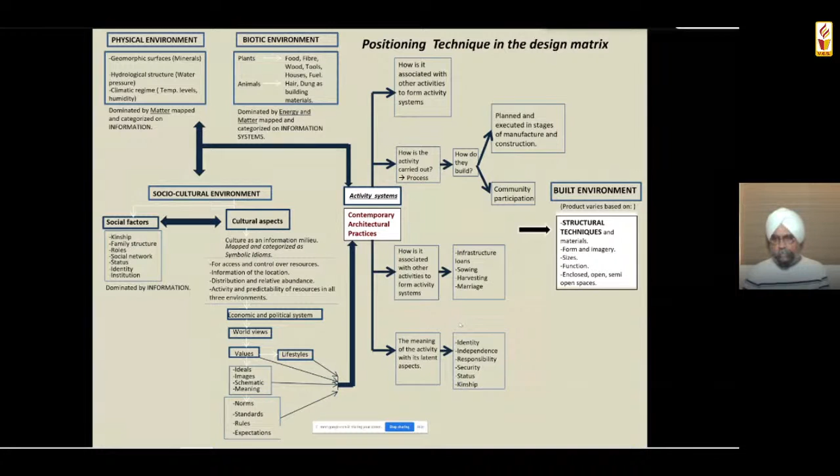So while the main theme of this talk is about alternative construction technologies and materials, I would like to share my perspective on this. If you can see on the right, you have the structural techniques mentioned, as you know, the end result. But there is a plethora of things which actually affect this.

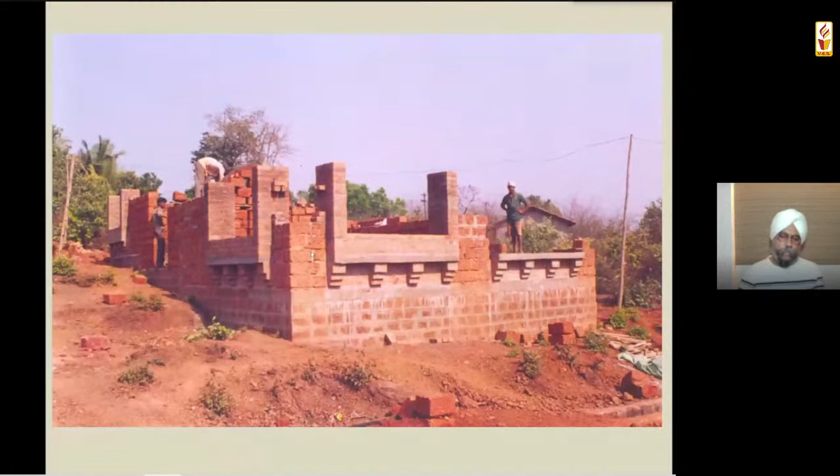Here's another example of applying Bakerji's techniques. This was a building in Goa where we used laterite because it's locally available. But in my quest to reduce the amount of cement and steel further, I used mud mortar in these walls for the first time, trying to make the walls without any cement. The slab is a filler slab with mangalore tiles on it for waterproofing and cooling. Here you can see the process of construction, where the bay windows are done in brick, the walls are done in laterite, and the arches were also done in brick, with only the keystone in laterite because it's very easy to shape a laterite stone at the site.

So you can see the mud mortar in the laterite wall here. This was my attempt to at least reduce the cement.

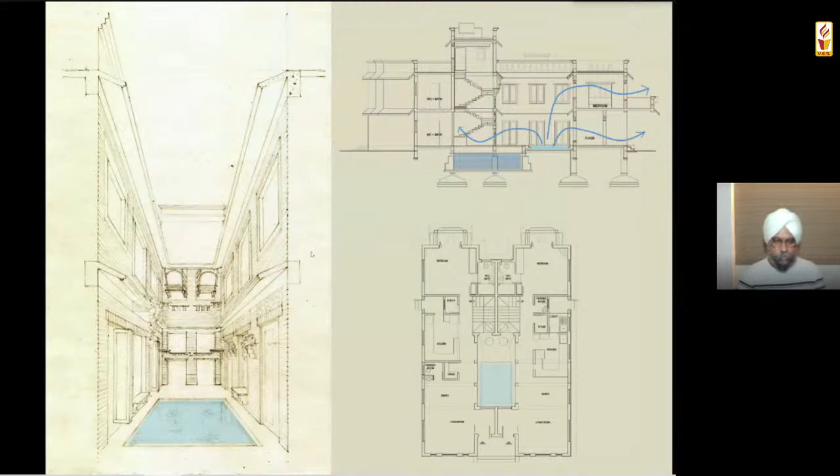Now this is a building in Gujarat, in Baroda. It's a twin house, built for and with my friend and classmate, Neha Kabawala. This is her house, and those are the drawings where we used passive cooling features. There's a rainwater harvesting tank, and a water kund in the center, which ensures good cooling in the building due to evaporative cooling—that's the chowk you can see.

Now my primary theory is that we have generally been studying, academically, the monuments or the urban buildings more, and there's not enough stress on the vernacular.

Whereas the 2011 census tells us that there's a very large population which is rural, and the urban is still small. So even in 2030, 50% of India will still be living in villages.

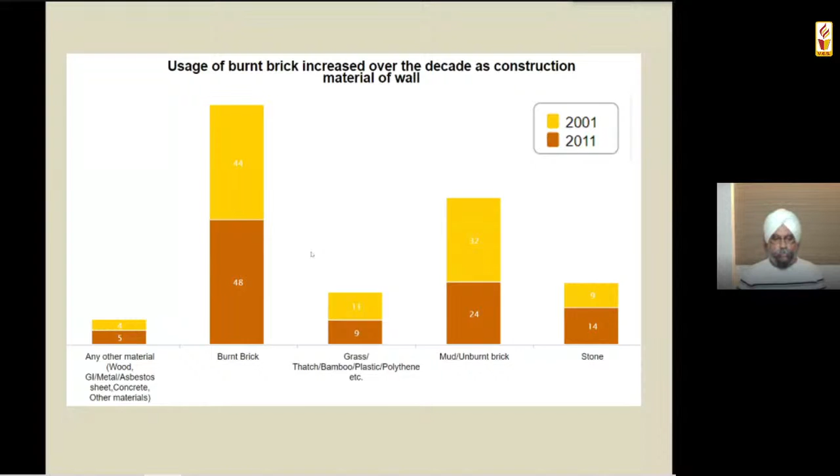Along with cement and steel, like Bakerji said. Here you can see how, between 2001 and 2011, the choice of materials has been changing.

Also, in architectural practices broadly, you have a high-style tradition and a folk tradition, and they are very, very different. So my practice tends more towards compromising the high style and learning more from the folk tradition.

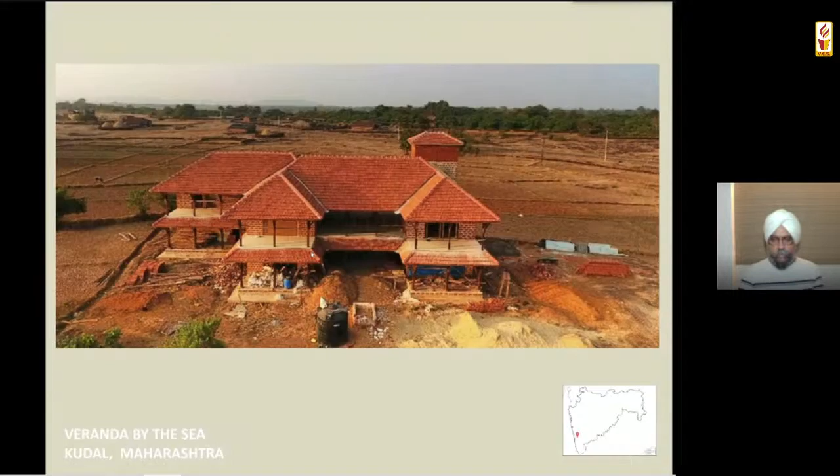This is a house we did. This photograph wasn't from when we completed it, but it was a good drone photograph, so we used it. It's a house at Kudal, just before Goa, facing the 180-degree sea view. You will see verandas on all the seaside. Now this building here, I was able to...

This is like a veranda, facing the seaside. Now, this is another project closer to Bombay at Kamshet, a homestay which is now also very, very successful commercially.

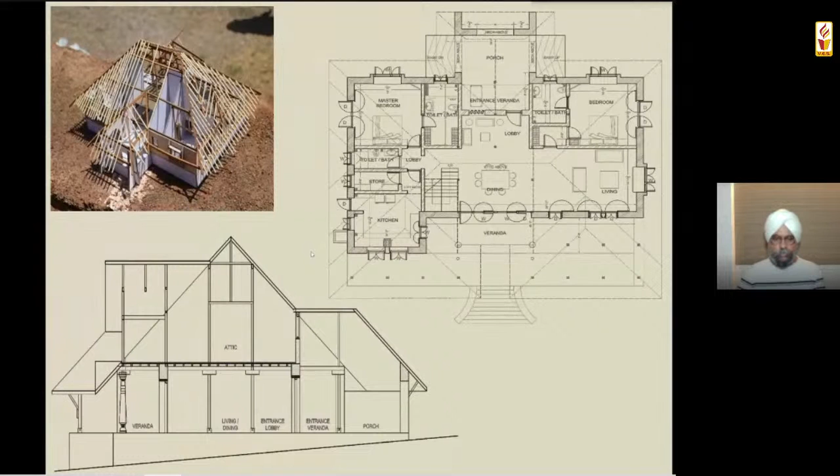You see on this side, you have stone masonry up to around 8 to 9 feet. You can see the model because there are very strong winds, and it's a sloping site, so the rains lash at this building from the west. Generally you have stone walls in this area - we learned from the vernacular technology. So on the west you had stone walls, on the east you have a veranda looking at a river behind. You can see the roof.

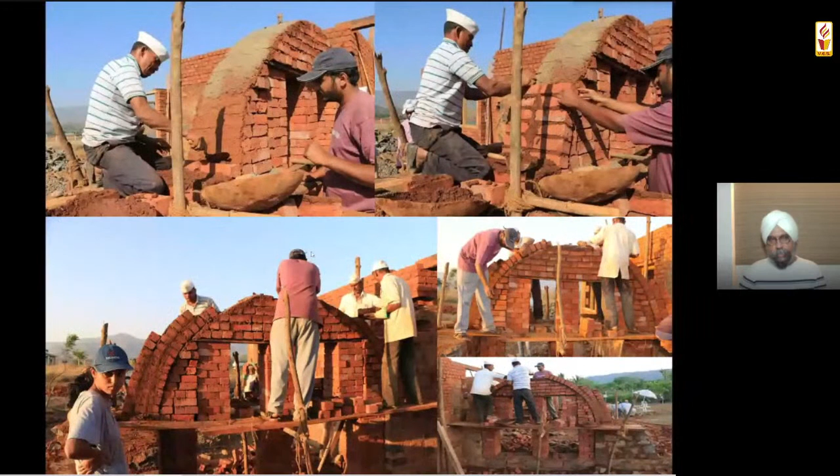I must say the client, Armaiti Mewawala, really participated very closely in the building. This is my team, architect Dhruang Hingmire and Priyanka Gunjikar, working with me helping the masons build the arches. You can see these arches are made completely in mud mortar, and this is how they look when complete.

That's the entrance porch of the building. That is how the first floor looks - as I said, it's a timber floor and the entire superstructure is timber. It's partly timber framed, timber post and beam, and partly load bearing structure. And that's how the balcony on the first floor looks.

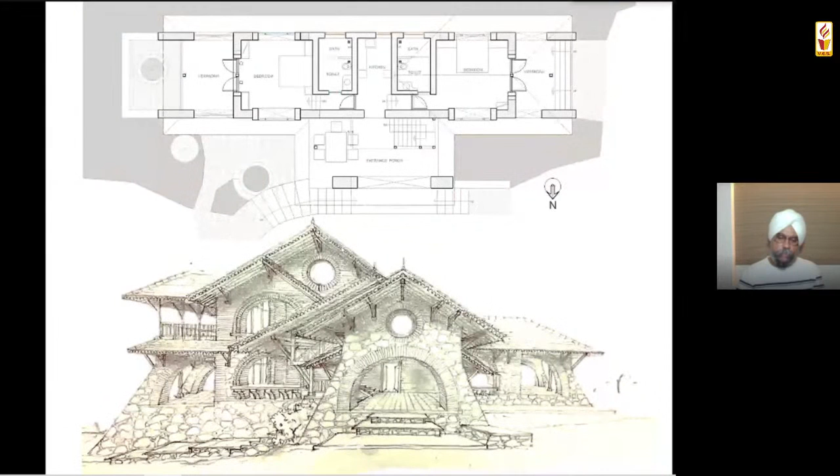We like to have a lot of participation from the clients. This house belongs to the same client - after the success of the first house, she had us design another house close to the first. This one comes almost perpendicular - you can see to the right, the house I just showed you in the background. This house sits in an almost side-open space, with a linear design, one room after the other, hence the language of arches.

This is how both the projects look together from the lower side. It is a sloping side, therefore we had a G+1 situation on the east, and there's a nice view from this side towards the river. That's how both the houses look together.

You will note the difference in language, but there is no change in the material palette. Because we had a narrow series of rooms, we used a different structural language, but the materials are the same. This is another house near Khopoli.

Same material template really, using... you can see how there's a double height space, and we make use of the veranda and the open space. You can see the planning in the model.

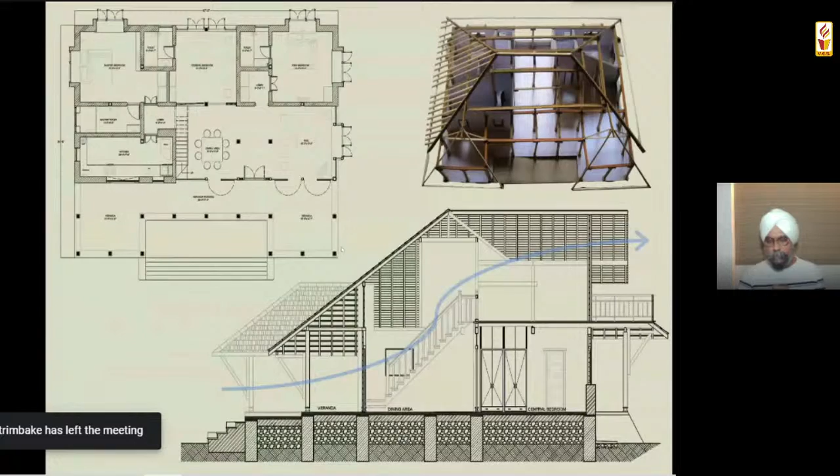Again, no cement or steel in the building, right from the foundation. All these buildings are done completely by local people. There is no team which travels from one place to another and builds these houses. Every place we work with local people.

That's the veranda, where most of the life is generally in these kind of places. I must also say that most of our users have slowly shifted more of their life into these houses which we have built. In fact, they spent their entire lockdown in these houses. They did not really come back to Bombay.

That's the open living cum dining area, where we did not need to have walls on the side of the veranda. So we made basically a fabrication plus glass wall, so that visually it is open to the veranda on one side. There are no solid walls, but the security and visual connection is there.

Here's an example of detailing and how we look at technique. This staircase is made entirely out of the leftover wood from the roof.

This is how a typical bedroom looks with the bay windows, lime plaster, bamboo jigs, and smart lighting. This is how the attic looks. It opens up to a deck.

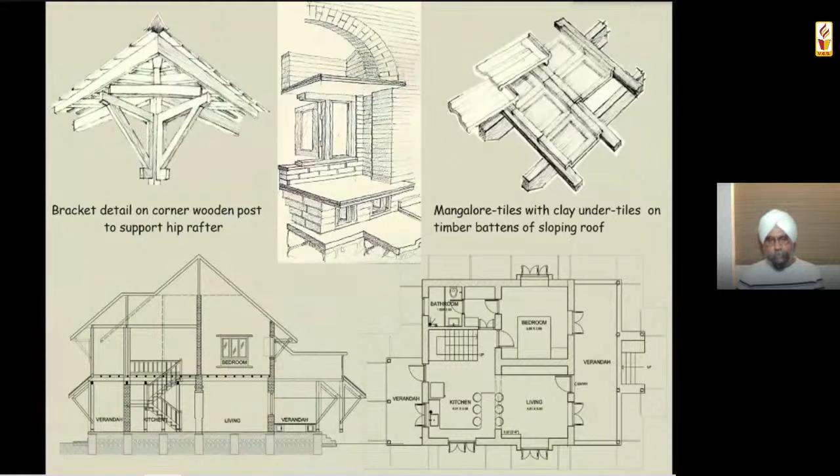Here you can see some construction details of how the roof is done. There's a double clay tile roof, so this is extremely efficient thermally, and there's a very huge temperature difference between outside and inside.

Then you will see the wall between the living and dining, and a living room upstairs. It's all done in mud mortar. That's how the roof is done, the double roof tiles, so that becomes extremely cool. And we made space for exhaust and diffuse light also coming in.

Now we work with different sections of society. This is a community of natural farmers, and there is a tribal family which lives there. So we help them make a house.

Needless to say, I think I will not say anymore that we don't use cement and steel. But here you can see a Cob wall, which is only 9 inches. The 9-inch mud wall was done by using intermittent brick piers.

This entire wood for the roof is basically from the trees which exist in that area, right behind the house. So we just made a scalable model, and that model was used in a meeting with the carpenter. The model was scaled, so they used it, they took the tree down, they seasoned it for some time, and they used the wood.

Also, the treatment for the wood was a kind of alcohol which they make out of mahua flowers. So what we do is we heavily discuss our details and treatments with the locals, and we keep adapting rather than using one standard detail.

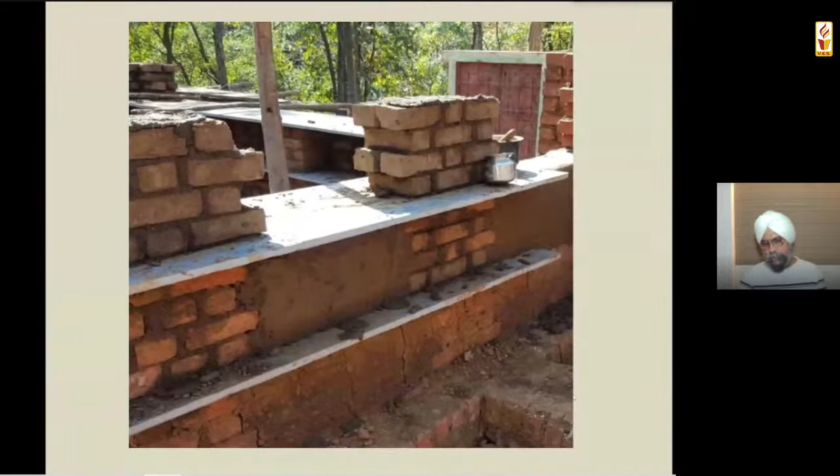Here you can see how we make a 9-inch Cob wall by putting these stone slabs in between, which later on acted as storage shelves.

This was a kind of diversity of people who had come from all over the world, visiting here to work on the house while we build it with our own hands. There were no contractors here. And the house is done at Gudi Padwa Day, and we all had a party after that.

So it's a community house done at very low prices with the local people and with people who participated in the workshop. That's the party.

Another house - very interestingly, there's one aspect I'd like to share. So you have this house and this house. Both were inspired - or let's say I used this house as a reference to show them.

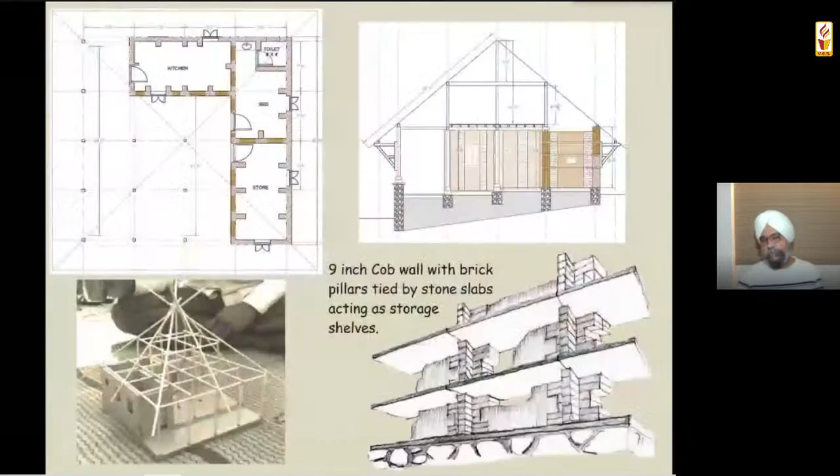So I showed them this house, and they all loved it. They were inspired and given confidence by the fact that this can happen in their area, and therefore they asked me to help them with this house and then with another house in this place. So the point I'm trying to make is that our architecture and technology can be very intentionally done so that people can copy the house and learn good things from it. It's a deliberate attempt to make copyable architecture.

Hence, the technology I use is generally very easy to understand and comprehend. It necessarily belongs to the local people, and is therefore just adapted by me slightly. That makes two things: one, it makes it copyable. The other is it makes it buildable, because I don't have to search for a team from somewhere and carry them into this place - I design after finding out what local people can do. So because of that, I don't have any opposition from local people about me getting outside people to do the work. I employ them only, so they actually very happily come and help my project succeed.

So this is another house in the same typology, and our details evolve a bit. Here you can see a bay window done completely in timber, so it becomes light - almost modular and easy to build. These are buildings where the open and living areas are all without any walls, as you can see, whereas the bedrooms have walls.

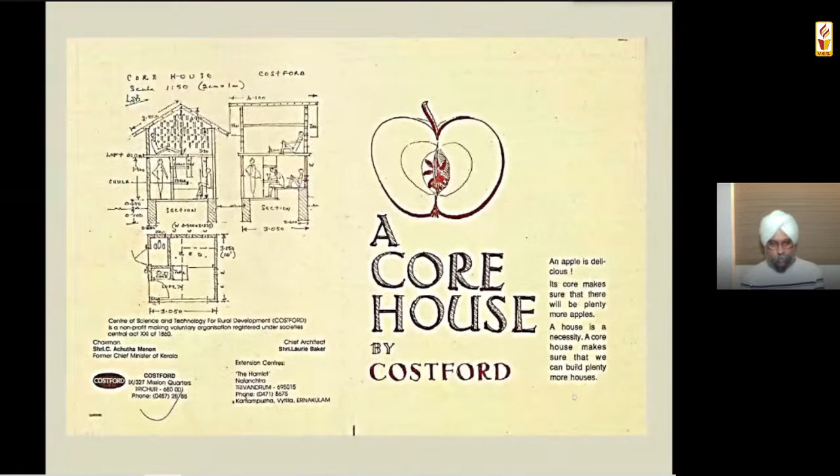I'm sharing a slide from Bakerjee's book, published by COSTFORD, where he explains the concept of a core house. So if you want to design in a village, in Indian villages, they use a core house as a concept. If you can see these sketches, there is a main building which is a little taller, but it allows for future expansion on all sides. This is the reality of the majority of the population of India, and it should be important to really factor in these things.

Here's another case - a traditional house in Wardha, where I've done a building. It's a classic case, central tall space. This place, Wardha, is one of the hottest places in the country, so it has nice thick walls. Gandhiji's Sevagram ashram is close by.

I use the same local technology. This is the house which I have built, and I'm extremely happy to know that the house does not look like it was done by an architect, because for me that is the success - where local people should be able to build it.

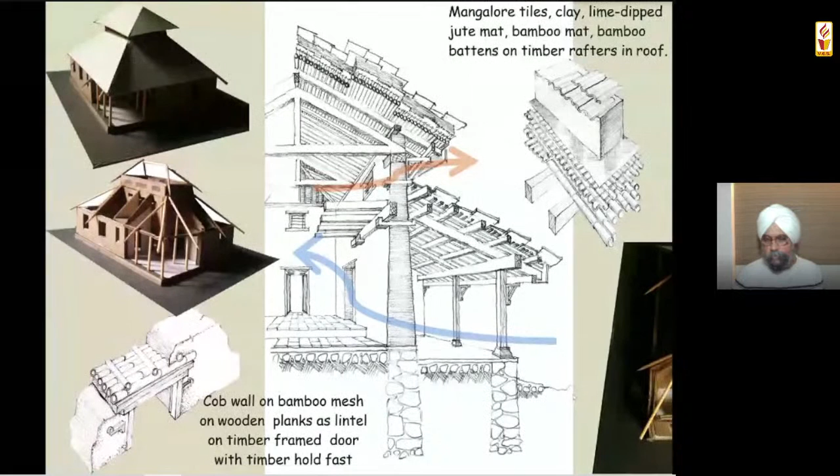These are the details - if you can see the cross section of the house, the lintel detail to the bottom left, the roof detail to the top right. The success of this approach is that this is the Cob wall being done over there - thick walls - and many people have been inspired by this and used these same people to build their houses.

So other organic farmers have had these houses built there with the same team. After seeing this - this is the roof where you see bamboo kind of boarding, on which further layers were put. This is the internal space where what you see as a raised platform is a dining area connected to the kitchen. These are completely mud walls, 16 feet tall - Cob walls which are almost 2.5 feet thick at the base, made of traditional, very clayey soil.

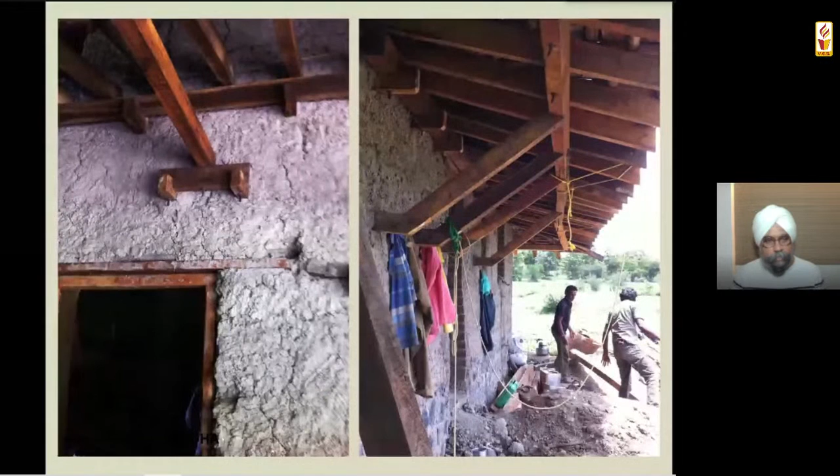It's trampled by bullocks and added with vegetable stabilizers, and some details which we evolved with the local carpenters. Here is one of our architects, Dhruang, working on a Cob wall, a 9-inch Cobb wall. This is at the Karjat project, the Vanwadi project, but with bricks and piers.

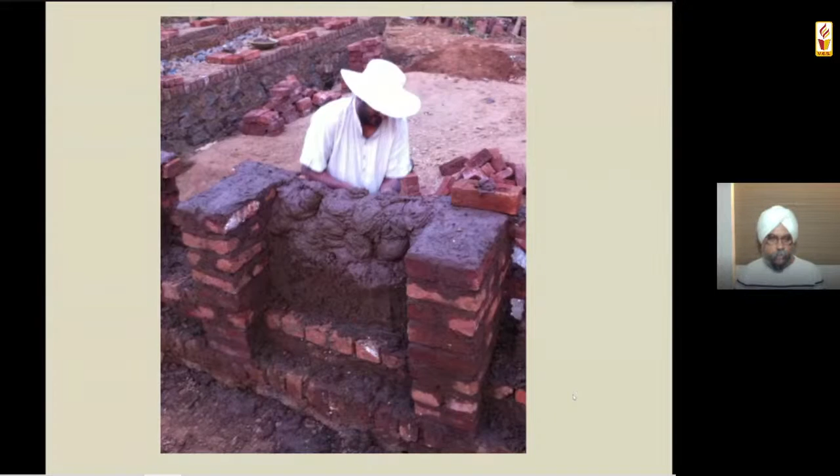Now I wanted to draw attention to a model of cultural ecology where Julian Steward says that technology is the window through which people may look at the environment. So our adaptations are mainly about how we use this technology. Unless you understand that the social and the ecological system are continuously related to each other, we will not be able to find good solutions in architecture.

Once again this slide comes up, where I will pause to explain that structure and techniques are an end result of a lot of considerations on the left-hand side. You have to see how people look at materials, and what the cultural aspects are.

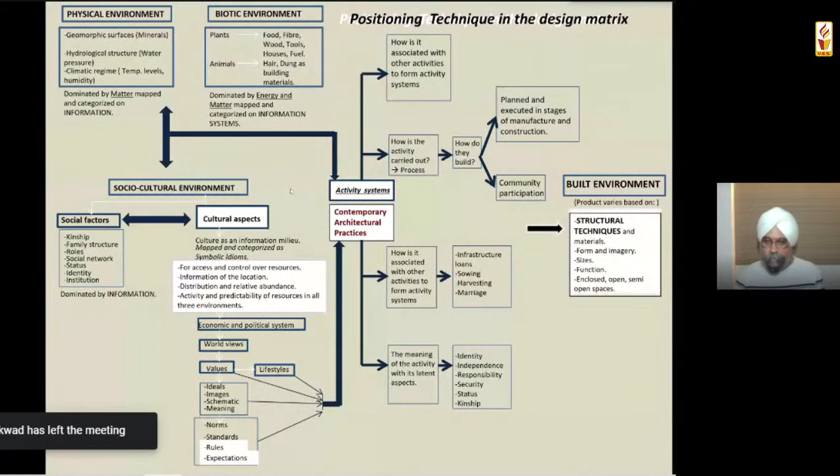I understand that the people I build for have economic and budgetary constraints, and if I use specialists from somewhere else to design and build, these people will not afford that. So I work with local people, but I tweak and add to their understanding, developing the designs a little so that the same local people can build it. That way, the cost remains in control, local people get work, and if someone else wants to do it, the same team can be used.

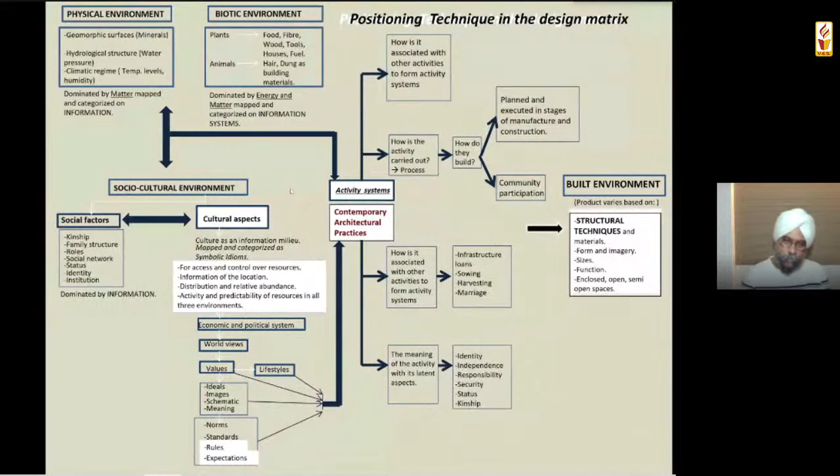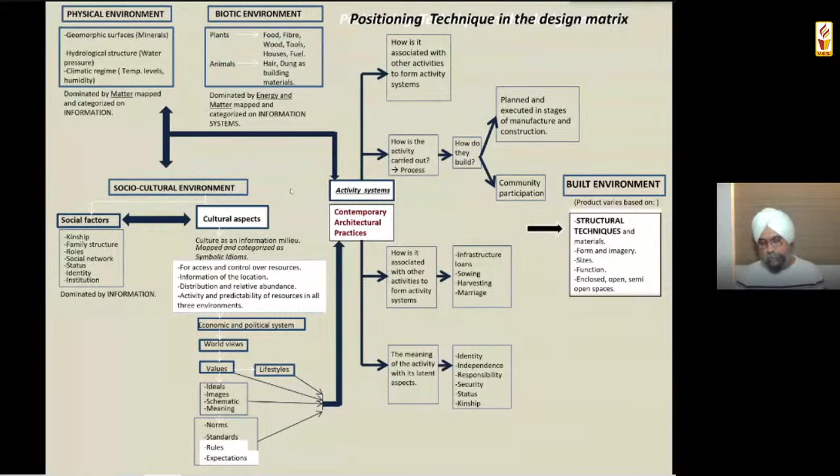People want to copy this architecture—I know that most architecture or fashion happens based on inspiration from what you see. I'm interested in creating good things to inspire people, good things to copy. When I say good, I mean with a very clear stand on the environment and on culture.

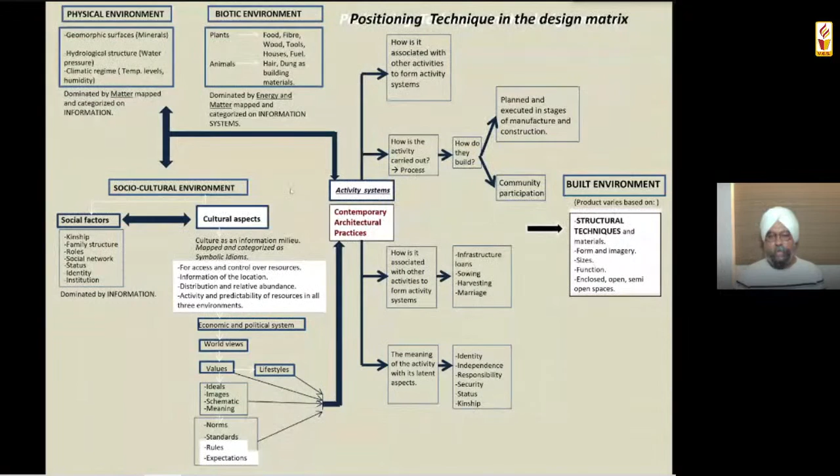I suggested we bring down this building instead of building another one—pull it down and salvage all the materials in the best possible way. So we went around looking for materials, local people, and local craftspersons.

We found a house which was dilapidated. People were ready to give away all the materials, and they sold it to us. The client was Keith De Silva—he was very sensitive and sensible.

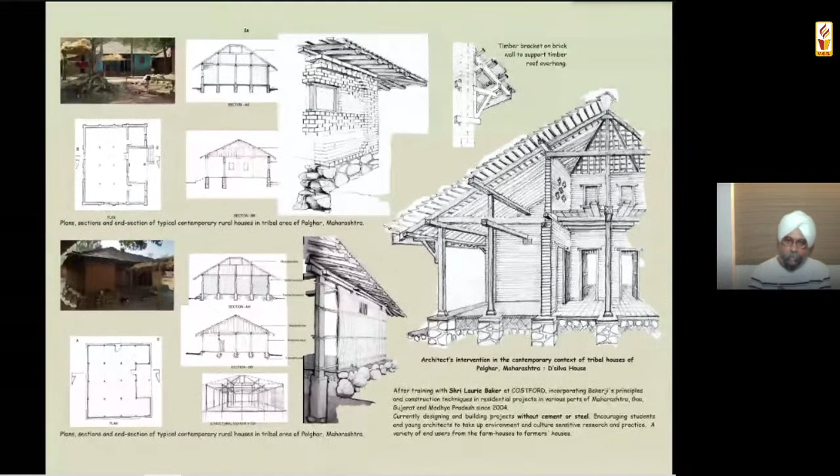That's the model of the house. That's roughly the planning sections.

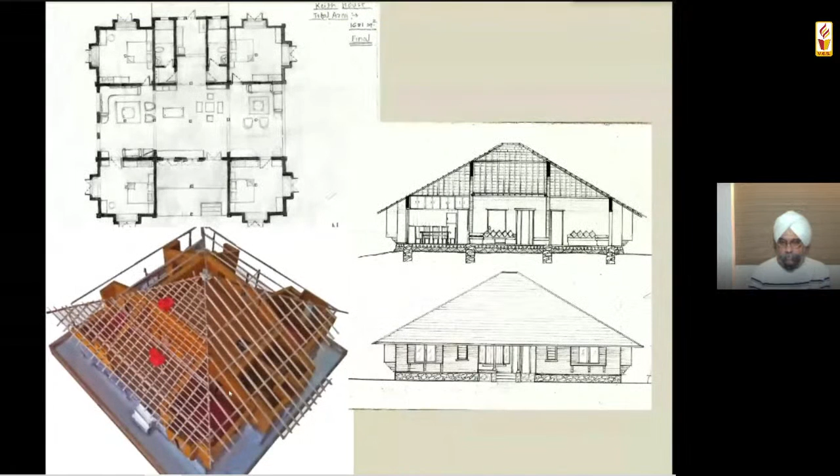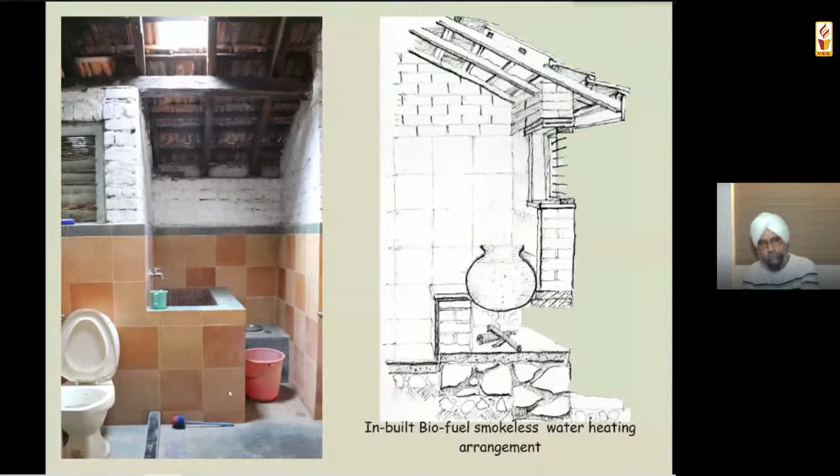This is the bathroom. You can see that we've made, of course, this was the client's idea, a kind of smokeless water heating vessel in the corner, as seen in the photograph. Just one glass in the roof, replacing a tile, gives enough light.

We made a couple of bedrooms which did not have any walls or windows. We just made a chick out of the local carvi.

The other 2 have proper walls and windows. So this client was very happy.

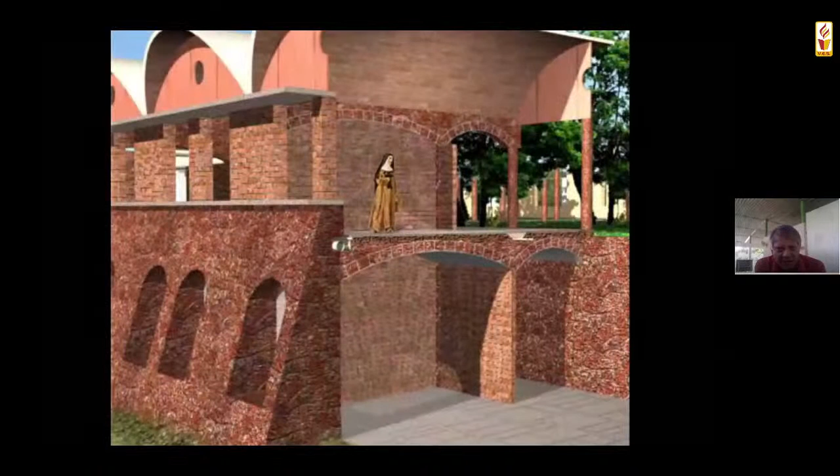So we realized one thing: when building in a masonry structure, it can last forever. An example is this monastery we designed, which the Spanish nuns wanted to last for 400 years. The only way we could design a building that lasts for 400 years is to do it completely in a load-bearing material, because concrete and steel, which are tensile elements, can only last 75 to 100 years. So how do we actually build that?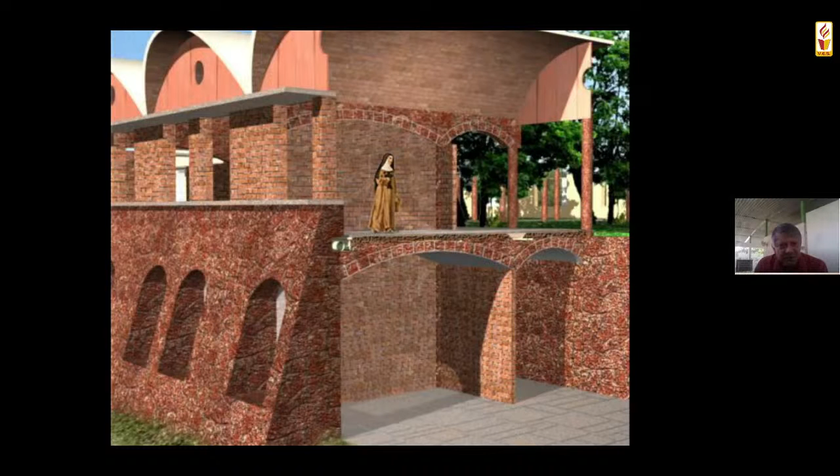Every system—the walling system, flooring system, roofing system—was planned to be completely in masonry. We left little areas for the services to be upgraded whenever needed. Of course, in the final product, being in Goa, we responded, at least in the roof, with a more traditional looking roof rather than a vaulted system. That's the monastery. We've also built in different parts of India.

This is the Hampi University in Kamalapur—the Kannada University, actually, it's called. That's just the library building. The library building itself is 50,000 square feet. It's an enormous library building.

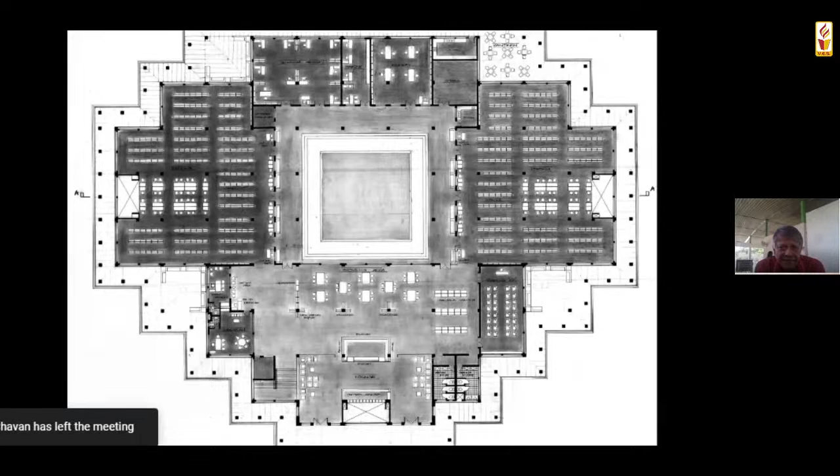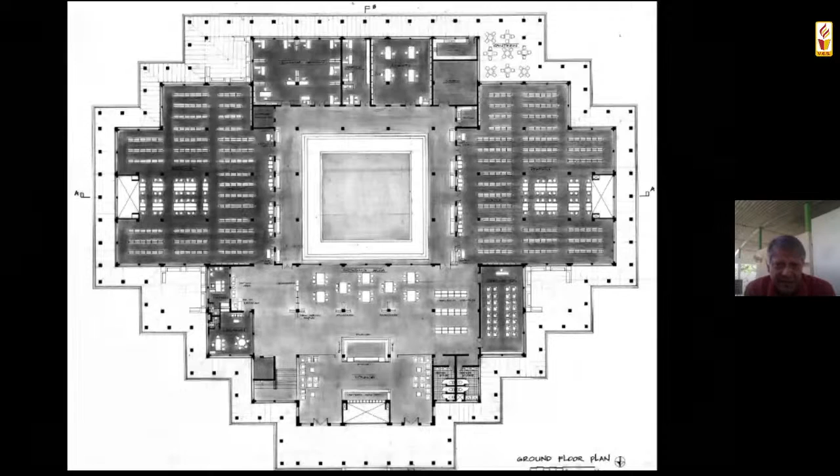It's taken into the building and escapes through a central courtyard which has a water body in it, creating a constant flow of air through the library, where you can see stacks and reading rooms. There you can see the gopurams and how the air moves. The whole building is almost completely made of stone.

When the contractors wanted to construct it—six meter tall columns, half meter by half meter—they said, no, we can't do this, we're used to concrete. We said, we did this 200 years ago, so why not do it now. They quickly got their act together and built this building in stone. So it's very easy for us to recall traditional systems in building. It's still available, and it must be tapped before we lose it forever.

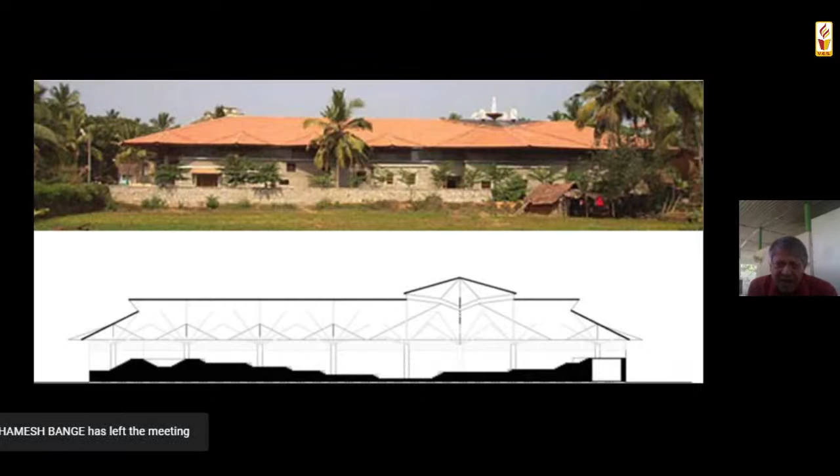This is the cathedral in Karwar, just south of Goa. As you know, a cathedral is a mother church, so it's an enormous church that can seat close to 1,000 people within it, and outside there's a platform which can take 2,000 people in an open air situation. The actual altar moves to the back entrance, and the whole service almost flips.

Here, granite is a local material. Since Karwar is an export zone for granite, all the waste granite from cutting those blocks we used in the wall of the building. And we created these floating columns.

Each column is an independent structure with a little pad that goes in the ground, and a flaring structural system that supports the whole roofing system, like trees almost. The wall is actually non-structural—even though it's solid stone, it only comes up to a certain level, with skylights above it completely. This lends the feeling that you're in a little forest, covered by traditional roofing systems of wooden rafters and Mangalore tiles, local to the area. The rafters we got from recycled buildings around the area.

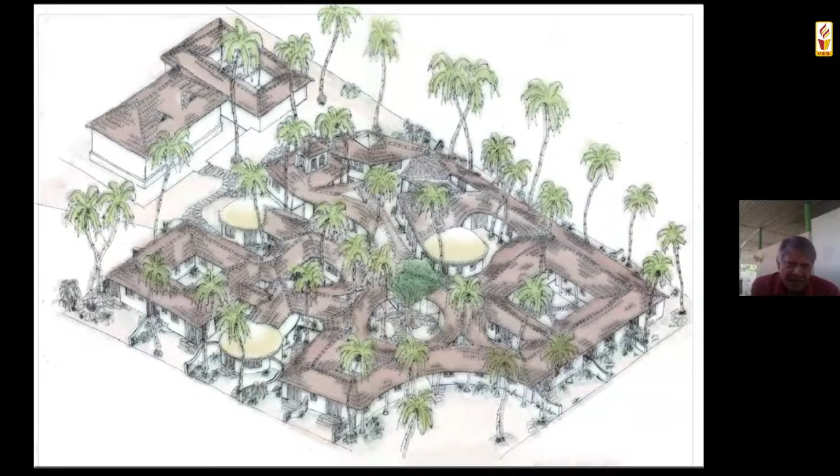Architecture is not just about buildings; it's also about the spaces between buildings. So in this project, which we initially called Country Courts, now called Laguna Anjuna, a small hotel project in Anjuna, we created a series of streets and courtyards which one moves through, with different shapes and sizes - circular, square, star, crescent - and the street moves through these courtyards, and from the courtyards you actually enter the rooms.

The rooms also have little mini courtyards of their own, private courtyards, and every room is unique - completely different from the next room. So in this way, we're able to create a sense of interest in the things. It's not like a typical hotel, where every room is almost identical.

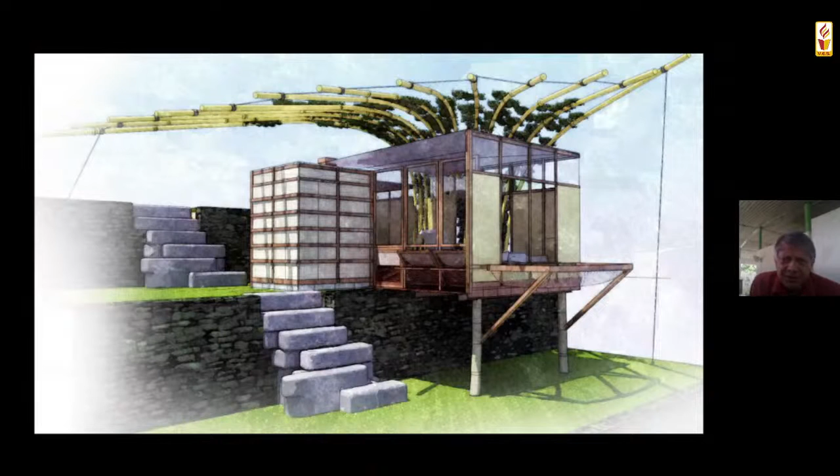So we work on a number of projects in which you can keep on shifting, which you can assemble. This is for a lodge on an island, made of panels of 2 feet by 8 feet, which you assemble together and put together. And every year you can keep on changing the whole configuration.

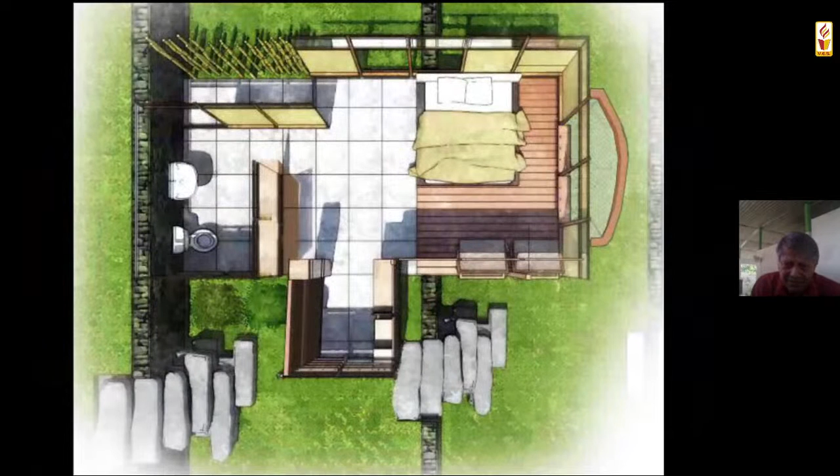And these wall panels actually also integrate the furniture, and you can keep on adding to it. So even for the public areas, it's a finished product. You can actually create a modular design.

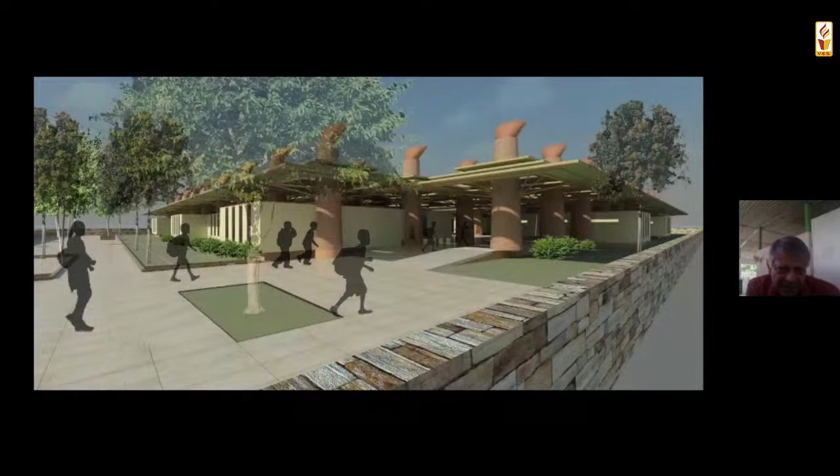Speaking about modularity, this is a school which imbibes the principles of modularity, based on a very simple grid. The grid is formed by columns, which are actually wind towers. These columns are brick towers. This is in Bijapur, where bricks are easily available.

Bijapur also has a high wind velocity, up to about 26 kilometers an hour, enough to actually take air in at a high level, hydrate it, and bring it down to cool the whole building. And the walling systems are moving, soundproof partitions.

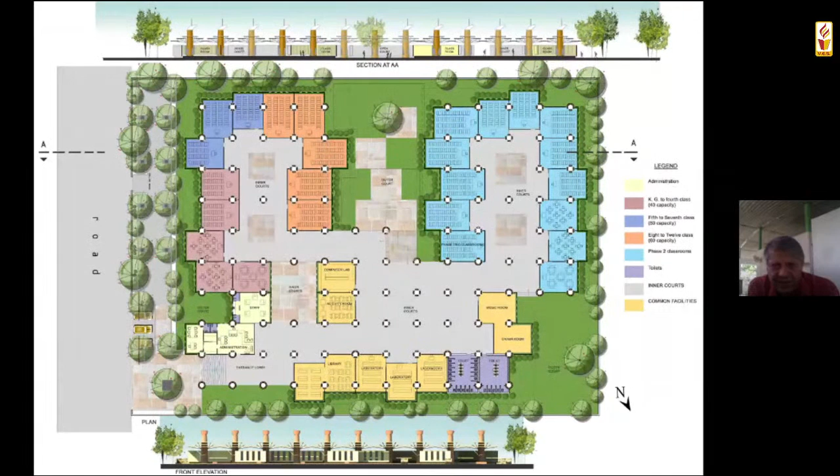So you can keep on changing the whole configuration of the school as it's being used. It's just a shading system, much like a tree, which allows the hot air to escape while the cool air comes in from below.

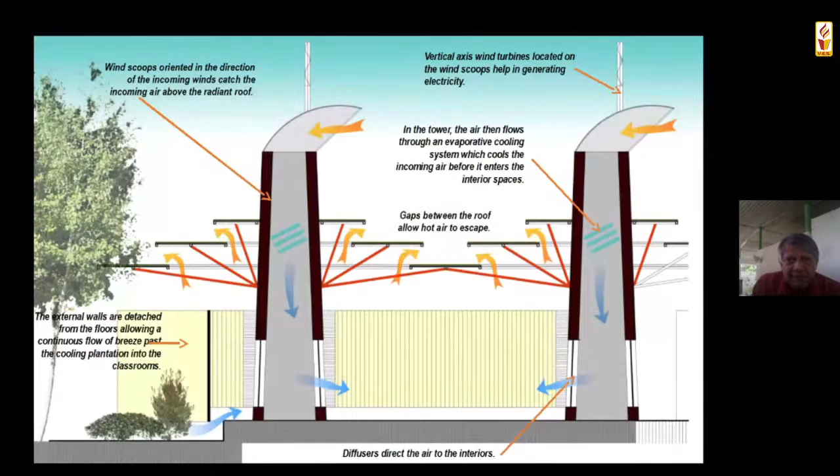This is for a project in Noida. It's a fully dismantleable building, with a hollow column, hollow beam system. The flooring is just made out of stone slabs resting on neoprene pads. And all the services, including the air conditioning, actually run through the building.

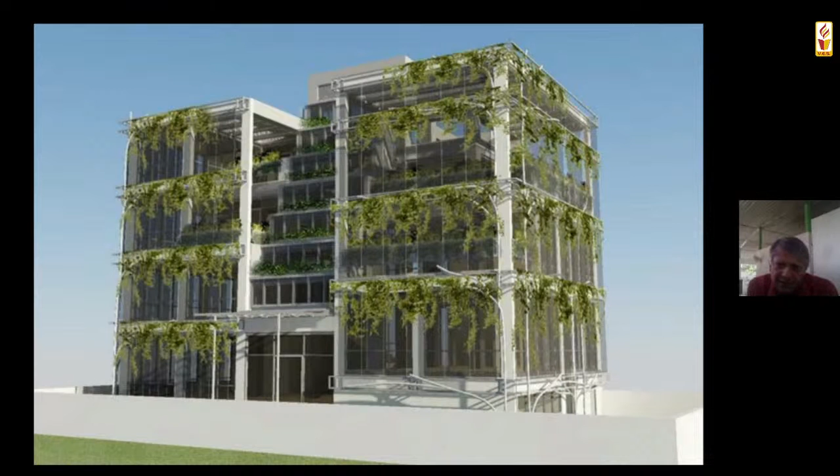Often in architecture, we have this clash between structure and services. We do the structure and we struggle putting the services through it. But here we decided to work with an integrated services and structural system. So you can see the hollow column system, the cooling system, green walls, the water bodies below that, and the various systems that we have.

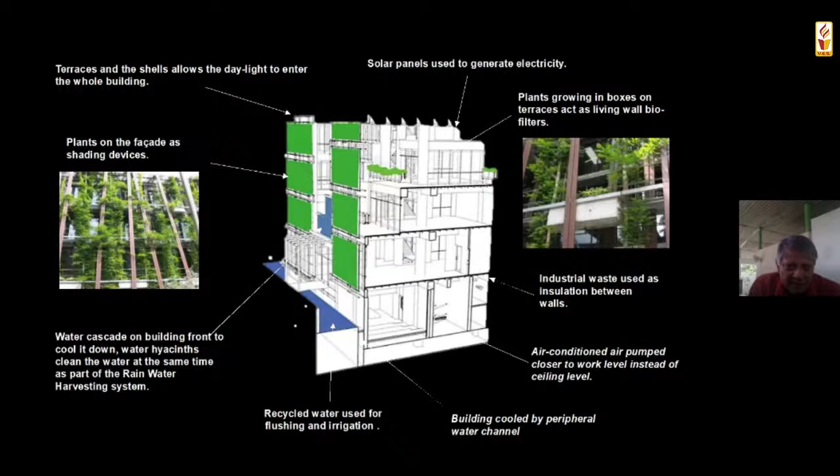Unfortunately, the building was not built because the client was asked for money. The corruption levels in a lot of these cities is very high to get a project passed. So it never saw the light of day. But that's the sad thing about architecture. And we need to, as architects, push against these forces which actually destroy architecture, forces which corrupt the whole practice.

This is for the Pune municipality. We were shortlisted to design their sustainable building technology center, just off one of the railway stations outside Pune. And so we created a center. For us, it's a great learning because it was done almost 20 years ago. It was the first time to actually look consciously at sustainability, look at technologies, materials, and systems which had design sustainability built into it.

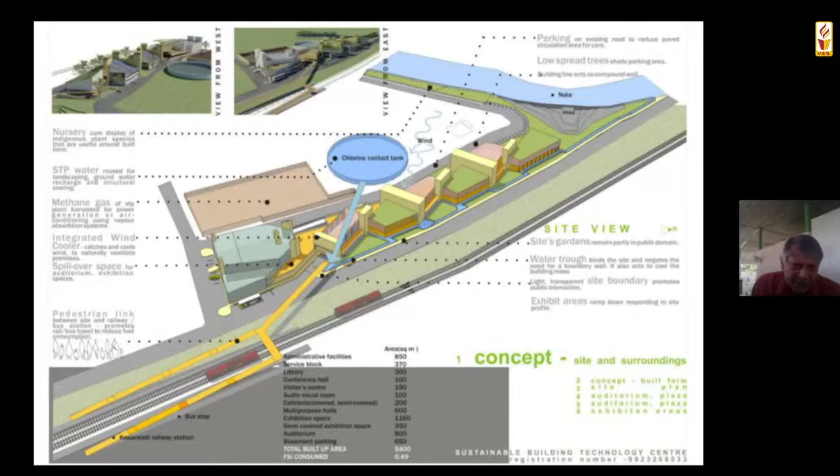So this was supposed to demonstrate the basic principles of sustainability, like an exhibition center or a science center, where people could go and actually experience it firsthand. So for us, it was a great learning experience. Again, unfortunately, this never got built either. But for us, it was quite a rewarding experience.

So when speaking about architecture, it doesn't mean that you have to always build. Because architecture is not just about building. It's really creating a system of catering and improving the quality of people's lives.

So this was for the Maharashtra Tourism Development Corporation. They wanted a 40-room hotel. And so we said, what you want is tourism. So instead of building a 40-room hotel, why don't you give tourism to the people? In this particular village called Hadi in South Maharashtra, we measured all the houses in the village, and said you can renovate some of these houses to create guest rooms for the farmers, the other traders in the village. And for the fisher folk over there, we created these floating platforms.

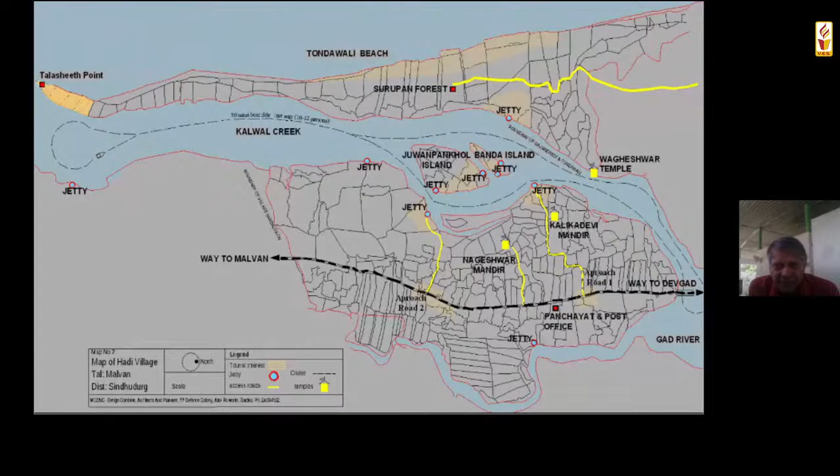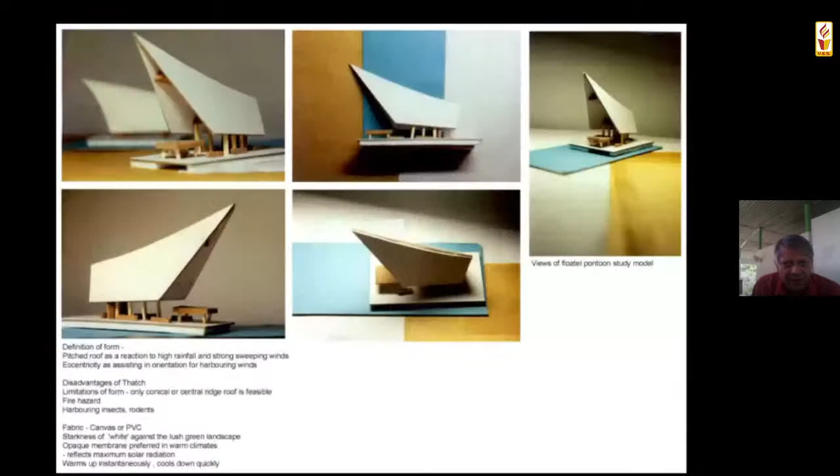Each room was a hotel room, which could come together or separate on this water. So the fisher folk already had a new form of employment. And the local villagers also could have these little pavilions, either attached to their house or part of the house, let out for guests to stay in. So they had a far more genuine experience. And the revenues coming out of tourism would go directly to the people.

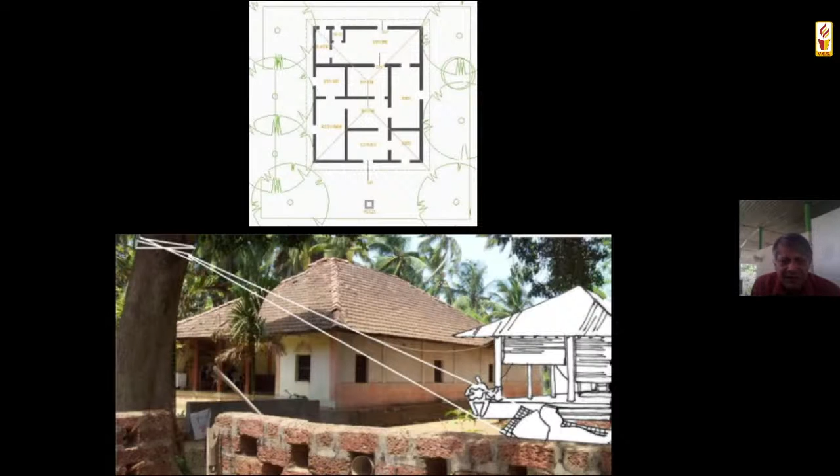So they didn't have to work as bellboys and waiters and cooks in the hotel - you gave them dignity. They became the owners of the hotel, and collectively they actually ran a hotel in the whole village. And all the money that you normally spend on building a hotel would go into developing the infrastructure - developing their jetties, their places of worship, their marketplaces, and tourist facilities needed to improve the quality of the area.

A lot of my practice has been actually connected to activism. I'm part of the Goa Foundation, which looks at ecological damage that takes place and fights it through legal means. So to keep me quiet, a lot of the times the government puts me on board with a lot of these committees so that my views are incorporated into whatever planning happens there.

So when I was on the committee to prepare the new regional plan for Goa, along with Charles Correa and Edgar Ribeiro, the first thing we did was recognize all the eco-sensitive zones of Goa - the coastal areas, the mangrove areas, the fields, the forests, the orchards, and the water bodies of Goa - and protect them. So the first thing we did was create an eco-sensitive plan, defining all the different eco-sensitive areas in Goa, grading them in certain ways, and defining all the watersheds of Goa.

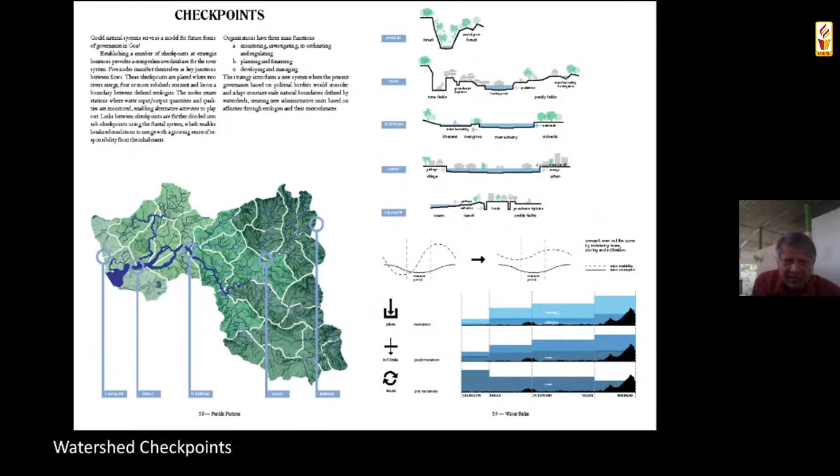So how do you define watersheds? The watersheds are the life givers of Goa. Each watershed actually waters or gives nourishment to a certain section, and generally a lot of villages are built around watersheds. So once you define watersheds, you can also define lifelines to village life. This is a study of basic watersheds in the area, part of the Mandovi watershed, and how we can use watersheds as life givers, and create communities around them.

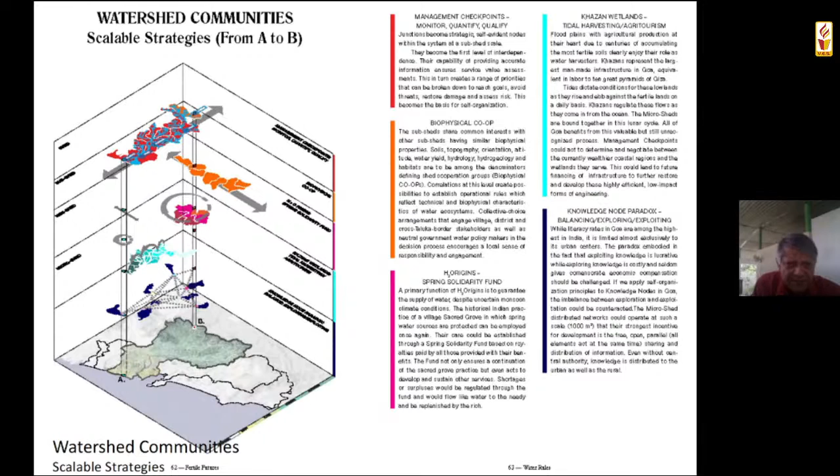So life around water—the rivers, lakes, wells—they are connected through underground streams. How do they connect to each other? And once you define that village, how can you actually let villages network? How can you create that network?

Because the village cannot survive completely on its own. Each village has a different resource, a different agriculture, a different sort of produce that you can trade with. And therefore, looking at the economy of villages and bringing them together.

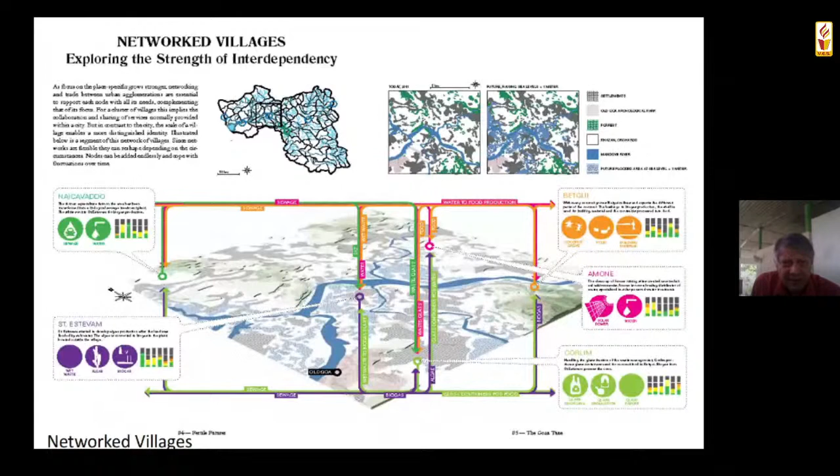So village is a unit of development. A village is a cell. Just as you have an organism made up of many cells, a village is an organism that makes up a whole region. A village is a cell in that organism.

A village consists of all the things needed for sustainability on its own—it's got fields, water bodies, orchard areas, settlement areas, grazing areas. All this forms an almost autonomous, self-sufficient system. But it does need to connect with others.

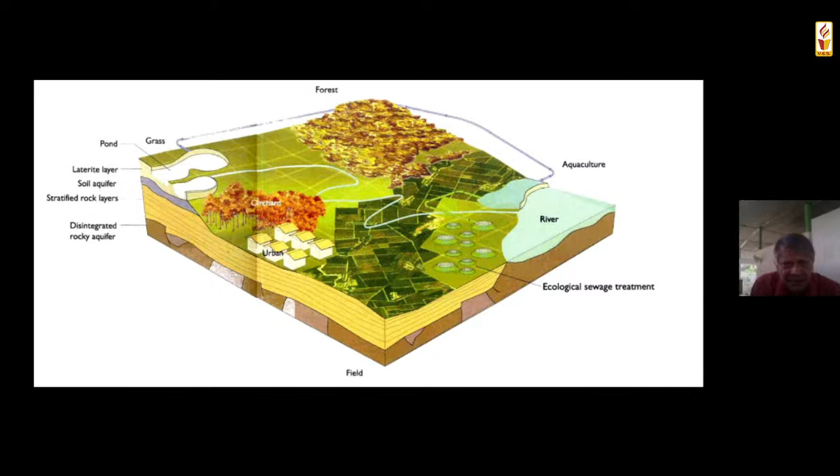Recognizing this is where we started the first step in preparing the regional plan, which is going to the people of each village and saying, map your village. Using Google, they understood the layout of the villages—where the fields are, the forests, the settlement areas—and started proposing development.

But before they started doing development, we needed them to understand what development and infrastructure was. Because for most people, development means buildings, roads, factories, infrastructure, electrical grids. And true, that is development, but that's the gray part—the hard, dark side of development.

There is a much friendlier side of development—the green part, which is where we get our water from, our food from, the air that sequesters carbon dioxide, all the nourishment that nature gives. And the area needed for the green part is probably five times more than for the gray part.

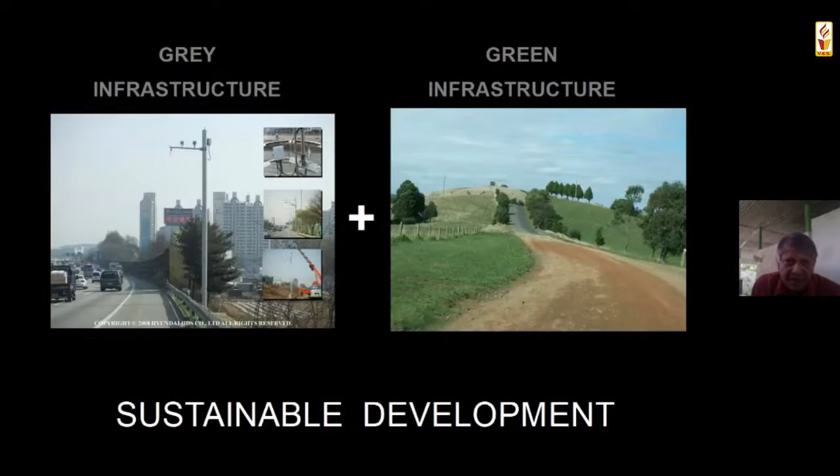So we have the gray part, which is defined in the village, and the green part, which is what gives us life. People needed to understand that before they actually started preparing their village plan.

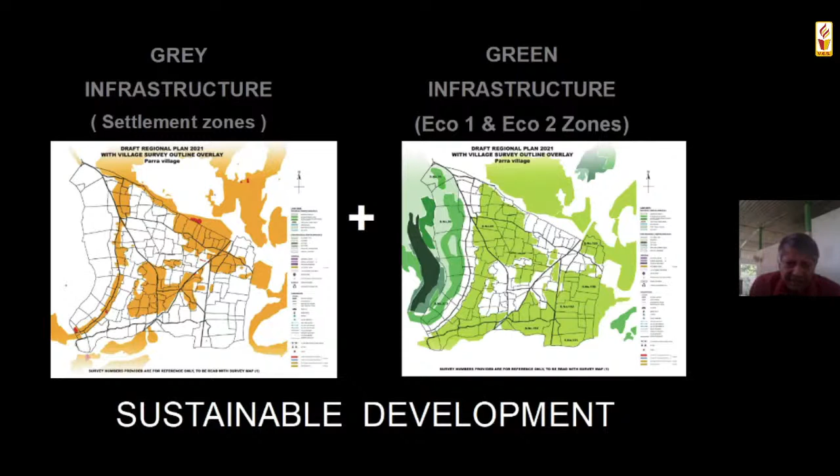This is the final village plan of a village close to me, the village of Parra. The people of the village started marking not only what existed, but also their aspirations—where they'd like playgrounds, water harvesting areas, and what sort of fields and crops they'd like to plant.

They mapped out whatever existed in terms of animal paths, bird nesting sites, and so you can see that a connection to nature was integrated into the plan.

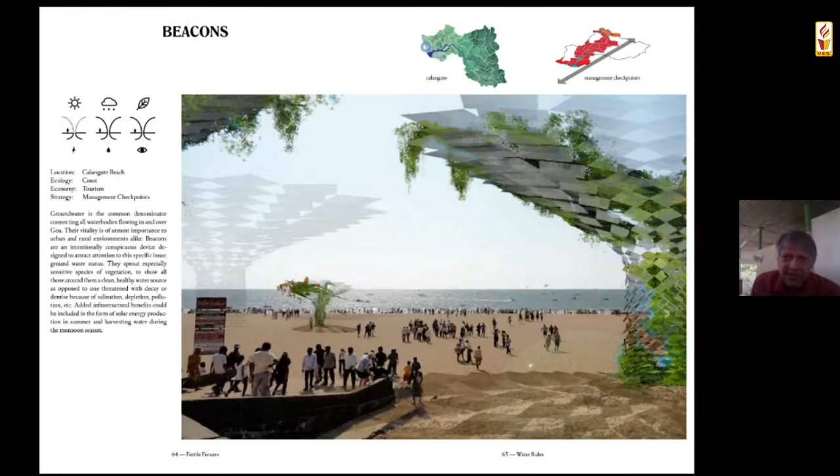Working with them was about creating excitement—it wasn't just the typical dead planning exercise. How can we make things exciting for people in coastal areas, creating centers that provide shade, stabilize soil, create water buffers in forest or field areas? How do we connect wildlife in one area? Because biodiversity is important, but it needs to be connected to flourish.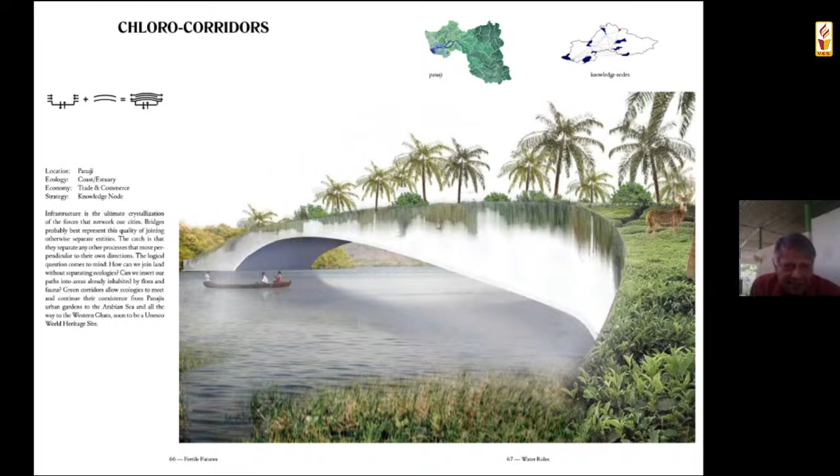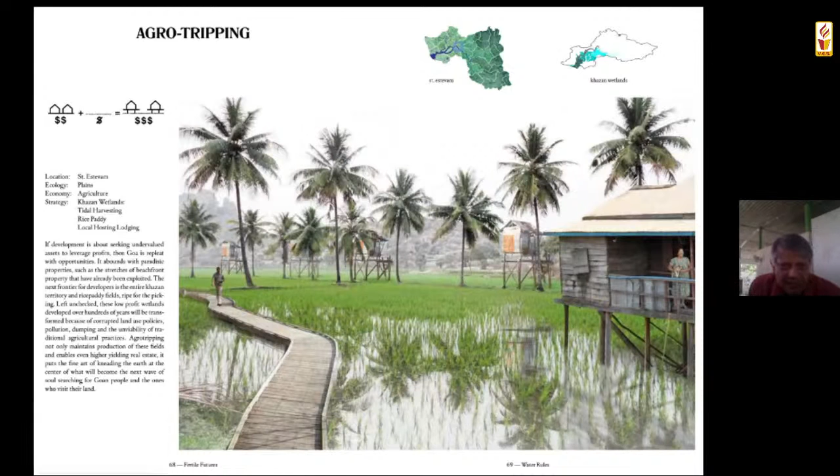Or new concepts of tourism like agro-tripping, seen in Southeast Asia—people living on the field side, connecting with nature, not just staying on the beach, but really seeing where their food comes from and how things grow. And of course, the deeper idea of creating biolinks between all the different dense forest areas.

When looking for inspiration among architects all over, one architect who is a big inspiration for me is Christopher Day. He's been an inspiration for the simple reason that while he designs houses, he doesn't design for a single person—he designs for many people. He's not designing individual houses; he's designing communities.

Rather than single wasteful houses, he's bringing people together, sharing their resources and their lives. A lot of these projects have common kitchens, common dining areas, common living areas, so people are sharing all the normal everyday burdens in creating a lifestyle. And he gets them involved in the whole design and building process.

Each unit may be completely different from the other, but they have a lot of shared resources that come together, and you can see how the development process comes together. They even share in their cooking and taking care of the kids or whatever. So you're building a community, and we've had this before in our traditional architecture in terms of joint family systems, in terms of smaller village clusters, but we seem to have lost it in modern day life.

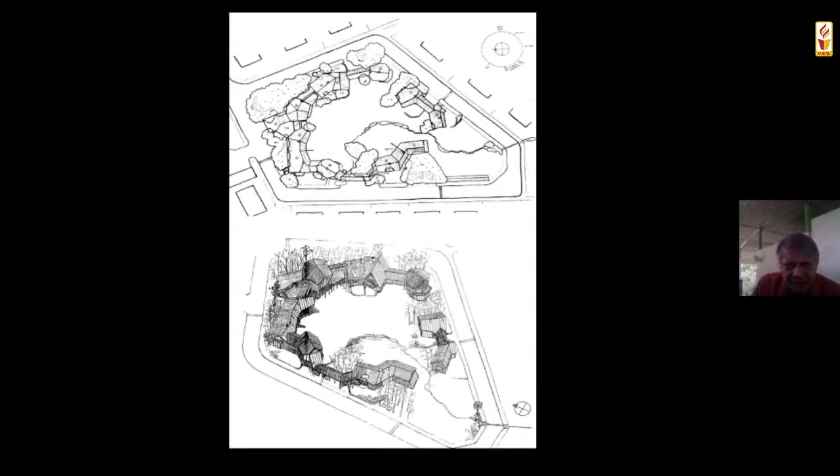There are a lot of organizations around India which are actually taking part in building communities again. Look at Hunnarshala, which started after the Bhuj earthquake. They actually got people to build again, taught them ways, and also built their community infrastructure.

We see a lot of buildings to do with rural setups being awarded continuously, through the Aga Khan Award, through the Curry Stone Awards. These are buildings which are actually bringing communities together, in some ways directly through community centers and other such buildings.

We need to define where we are heading as a profession, where we are heading in terms of our cities. Today, architecture and nature seem to be at clash with each other because everything seems to be catered for one species, and that's us. Whereas nature is all about diversity and protecting all aspects, here everything is being destroyed just for one species. So we need to redefine what we are doing and how we actually reconnect to nature.

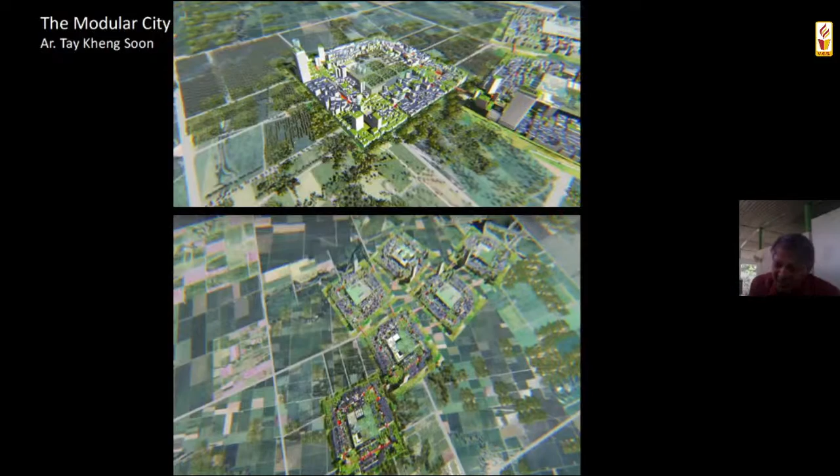And therefore, the village model is actually one of the most efficient that we can think of. It's just a question of what do we keep at the core, how do we identify the core, and how do we actually build into the future.

So if we're looking at what happens to our cities in the future, one of the simplest approaches is to look at brownfield projects. A brownfield project is basically one where we're using land which has already been wasted, rather than expanding into fields and valuable areas like you see happening in places like Gurgaon. It's about identifying areas which have already been damaged and building in those areas.

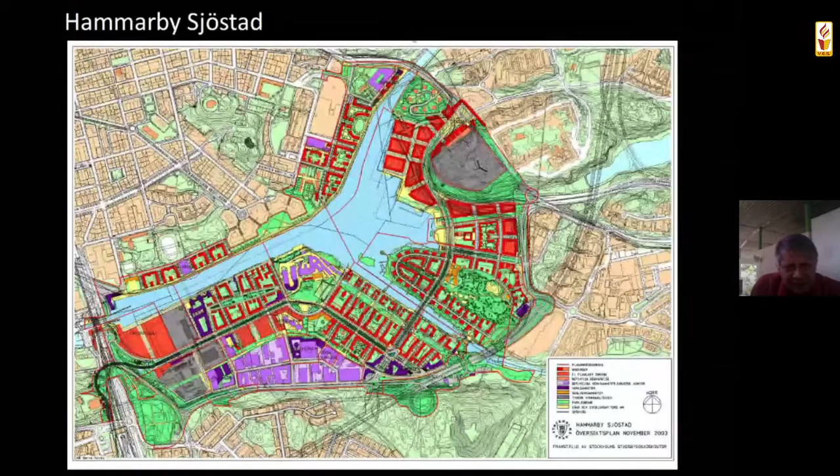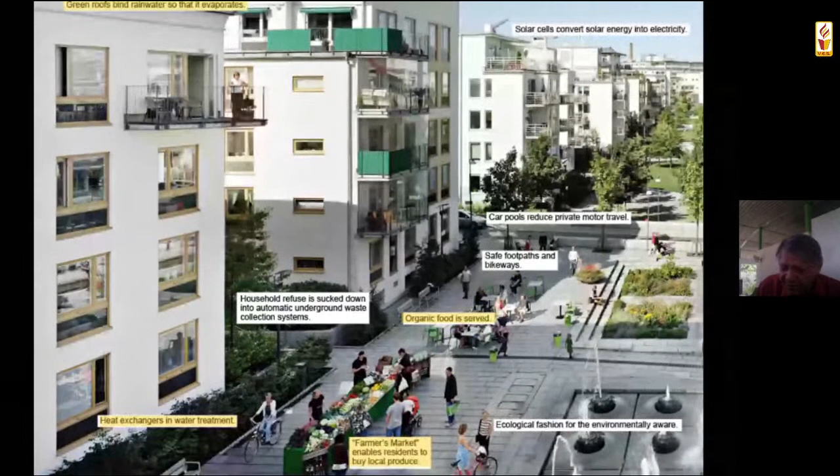So this is a small twin city outside Stockholm, which I visited a few years ago, built on an old industrial site. It's very simple, low-rise buildings, just 5 stories high, so no lifts, which connects to the ground. It's created new communities where all the systems of water, food, and waste are integrated into one. Everyone grows their own food in close proximity to each other. While there may be larger agricultural lands around, it's extremely close to the core of the city. And everything is visually connected in some way, creating a new way of living in a very modern setup.

And we're looking at a new way of living. It's all about closed loop systems. It's all about how do we deal with energy, waste, water, and make sure these closed loops work like a traditional village in a way.

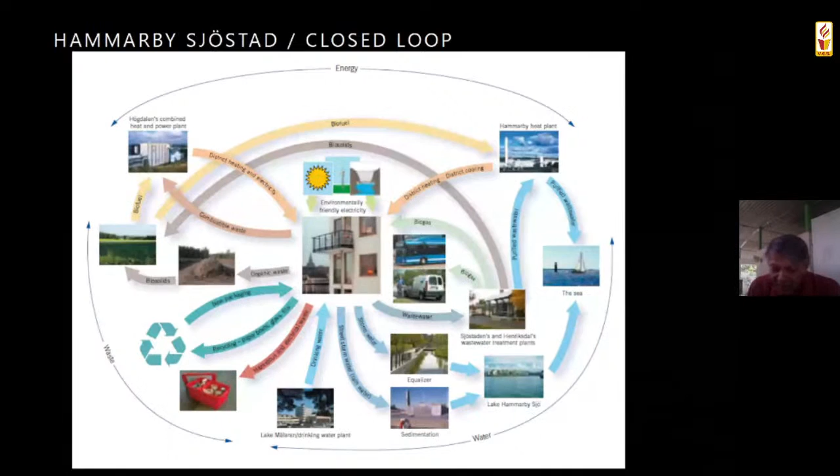So there are various movements of slow cities, edible cities, where people are growing things in proximity. Especially in the pandemic, we realized that people want good food at close proximity. They don't want it coming far away, sometimes with disruption. They want it organic, they want it pesticide-free.

So all over, people are now trying to show examples, like the Eden Project in Cornwall in the UK, which is a great demonstration of green living, about creating different environments, mimicking different parts of the world, showing new technologies and new materials which can show the direction for the future.

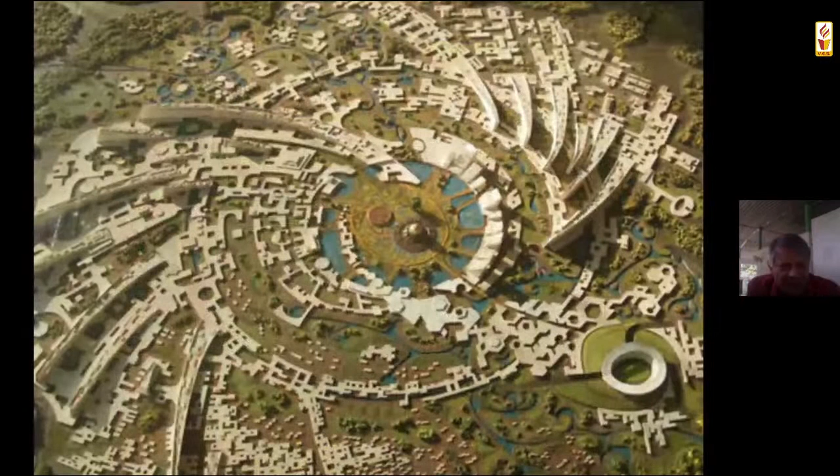And we have examples, not necessarily in material, but also in terms of lifestyle. This is the social system that evolved in Auroville, where they've actually modeled it around the spiritual core, and it spins out to the outside with the Matrimandir. Auroville, of course, has also become a hub of innovation and technology, trying to push the boundaries on new and sustainable living.

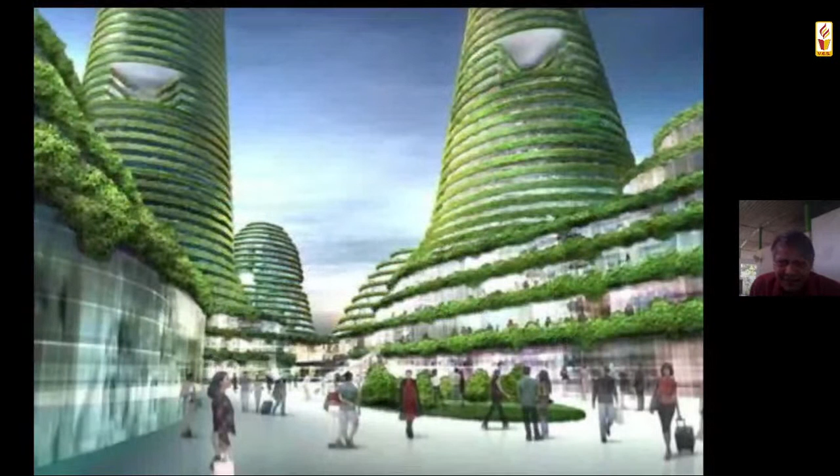So there are examples from all around the world trying out floating cities or green towers and green buildings. People like Gaudi have tried using innovative methods. We virtually need a new combination of an artist and a technologist, people like Gaudi, to actually do this.

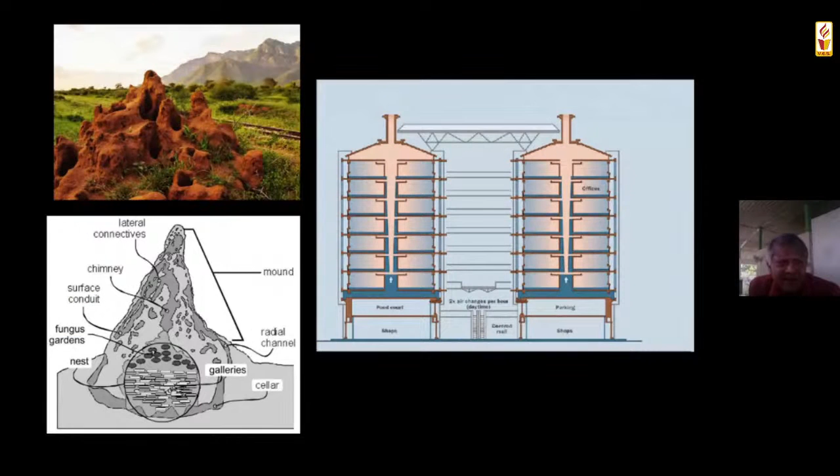And there are people who are trying various examples, drawing from nature through biomimicry, pushing the agenda. This is like trying natural cooling systems run through the building, doing biomimicry like what Gehry had tried—of course this is mainly just in form—and exploring structural systems like Calatrava's.

But there's a great history of really innovative buildings, even from the past. Especially in the Middle East, you see these mud buildings, which are enormous, sometimes 8 stories high. And you see various sorts of experimentation using local materials, responding to local climates.

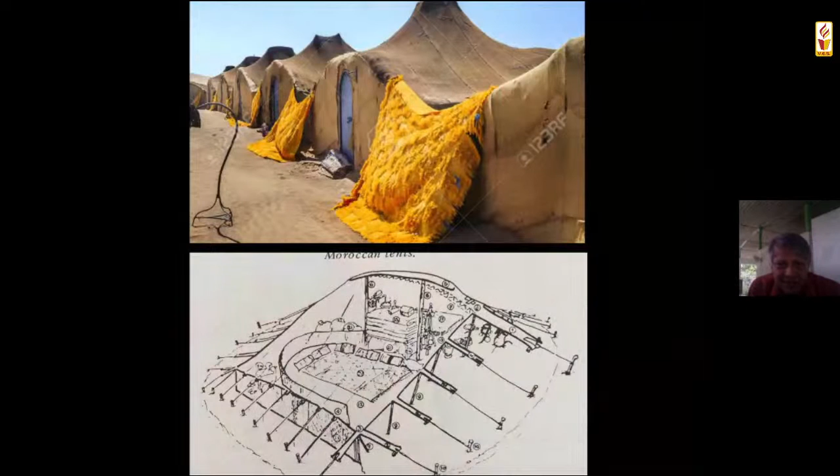In Morocco, of course, the buildings are shaped by their lifestyles. In Egypt, Hassan Fathy's work responds to the climate there, handling ventilation and the materials used for construction. In Ladakh, Sonam Wangchuk and how they heat buildings.

And even at an individual level, we see architects and designers pushing the boundaries and trying to show a way forward. This is the work of Revathi Kamath, pushing that agenda in her own way. Neelam Manjunath and the really innovative buildings she's experimenting with. And even people who are not architects, like Didi Contractor, a tremendous inspiration, especially to young architects, in pushing this agenda of green building.

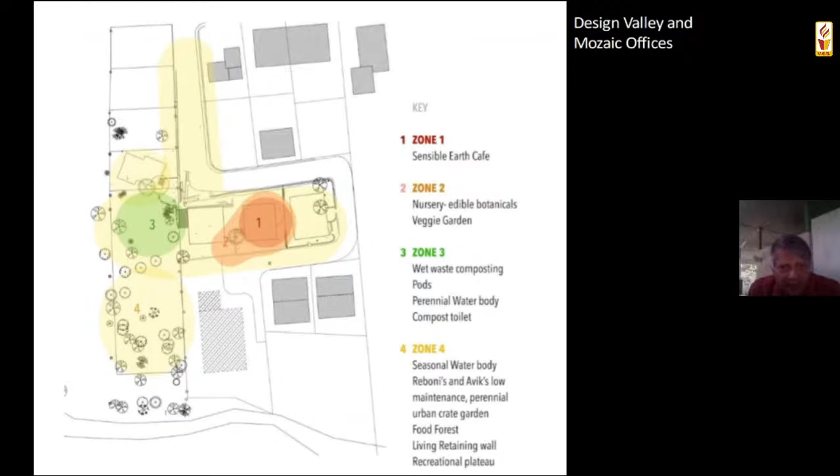We ourselves, as architects, are trying to do it in our own small way through our own center. We're part of an initiative called Design Valley, in which we've formed our own little community of designers and architects. We've got 3 buildings: the design center in the center, the architectural building, and the product design building on one side. They form a community with a lot of our residences, other architects and designers around. So that's the 3 buildings we have here.

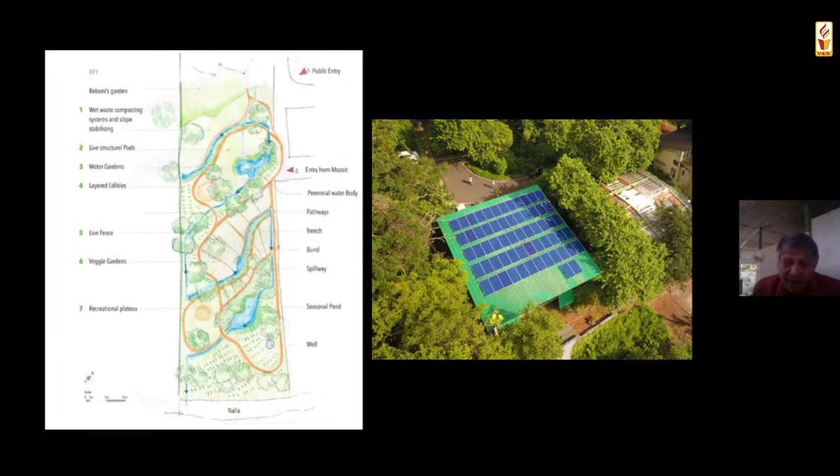And at the side, we've got a large tract of land, which is the permaculture area. We've got our office in the center, which is really off the grid, and it powers all our buildings with solar energy, along with the inside spaces of the buildings.

But as I said before, the whole practice is not just about the building, it's all about creating communities. So using our buildings and all the space we have, we run programs dealing with growing food, energy, community efforts, the arts, and sharing ideas as one. So our role as architects is not just about responding to design and building things. It's all about actually building the world around us, sharing all that we know with the communities around, and bringing communities together. Thank you.

Before you start, I want to tell all the participants that I worked under Dean D'Cruz in 2001, and we all know there are very few legendary architects in India. Dean D'Cruz is not only a great architect in terms of designing, but he is such a wonderful human being. I personally experienced that to be a great architect, you first have to be a very good human being, and Dean D'Cruz is like that. Because he is like that, he is into so much social and responsible activity. So definitely I owe my initial year of learning to Dean D'Cruz, and thank you sir for coming here and giving such wonderful wisdom on architecture.